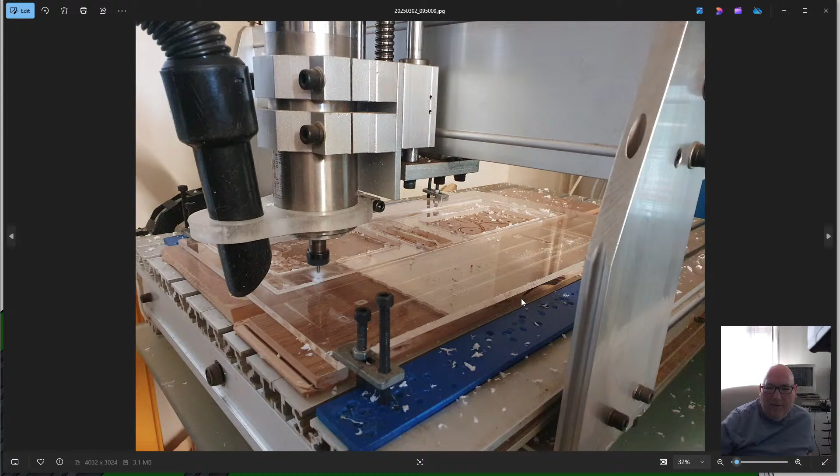Open. Oh, I took a picture of it. Oh, there's my, there's a panel. Took a picture by mistake instead of video.

Alright. Yeah, so it makes a right mess. Anyway, let's come out of that one. Come out of that one. Let's see what we got video wise.

Yeah, very messy. Don't know what's cutting out. Oh, the back panel. It's a milling of the back panel.

Gonna have to get the laser set up because there's too much tidying up to do after. That's the problem, too much tidying up to do, like, after you've finished. Sounds like hard work. Right, what else we got?

There's a bit of it cutting out the back panel. Tell you about the problems we had. Some problems. Just tidy up, look at the milling bit. All the plastic's stuck to it. See it? Not good.

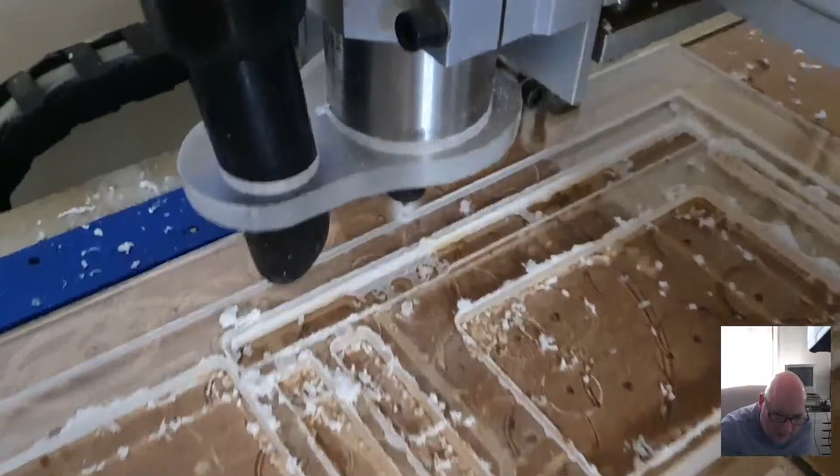I hope it isn't too loud. I hope it isn't too loud. Anyway, we can jump past that. Oh, it's only a short video.

Yeah, it flung it all over the workshop, all over me shirt and everything. Right, last clip. Might as well just let this go. It's just potting some holes.

Yeah, it's going to have to be laser cut. Well, I'll use this as a prototype for me to get all the sizes right. Vacuum's on the go now. Yeah, it's noisy.

I bought a milling bit as well from a tool station. It's like, you know, like a tool shop you can go and buy stuff from. It did half a thing and then it snapped. And my fault.

That's it cutting out the... Oh, I think this is the shoulder, the CD caddy shoulder or shelf bracket. So we're gonna get the laser machine out, but it only does a certain size, so I'm gonna have to see what's the greatest size I can get out of it.

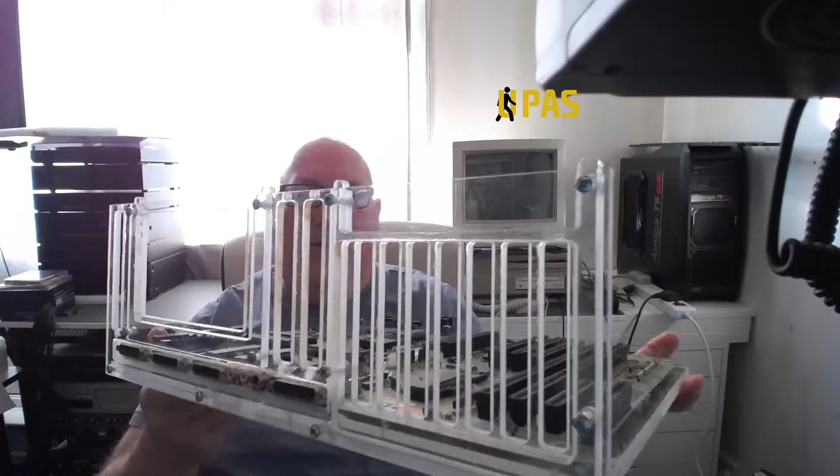It's already heavy, so we got the. It's looking like a back plane, isn't it? Power supply and shelf there.

So it holds itself okay. The idea of fixing it there, there, there and there was okay, and they're fixed. If you can see the nut and bolt.

I had to cut them by hand with an angle grinder since I didn't have the right size. Obviously need to buy the right size ones, and then the rest is just fixed in place. I'll make this a short one, and I'll put this one out on some of the Amiga groups.

A few scratches and that - it is reclaimed plastic after all. Some of the holes went a bit wild, and then we got the trim around here, pocketing it. I found out it's not a good idea. We've got to avoid pockets because it just goes milky and white. I knew it would, and then it started breaking apart because it was too thin.

So we'll just create one and laser cut it. This is okay as a template to make sure your sizes are sort of in the ballpark, but yeah, just a proof of concept really. And it holds it pretty stable. That hole there made it thin and it broke - it actually broke there, but because it's rigid, held to the bottom, you can't tell.

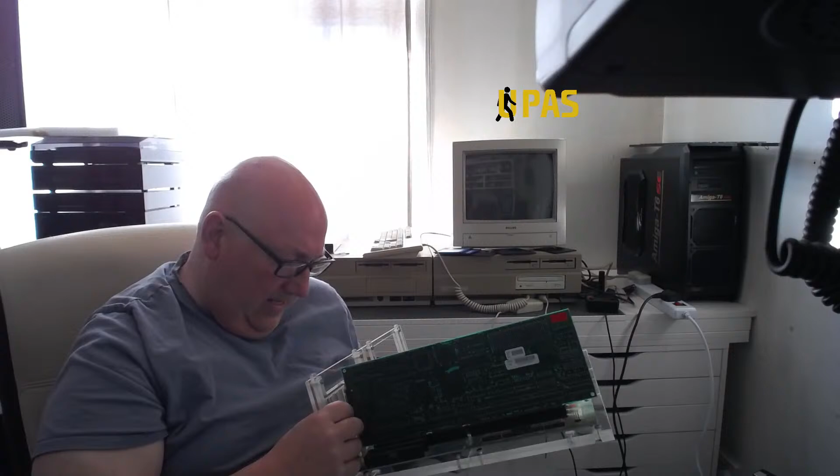Let's have a look. Not sure - that doesn't look right, does it? Something doesn't look right, and I'm not sure why. Is it touching the floor? No, it's not. I wondered if the steel bracket was touching the floor. Touching the base - it's not. There's enough clearance, so that's not the reason.

It's all the way in the slot. Let's see if it's angled. Okay. I haven't actually fastened the motherboard down right yet - got some screws missing. Yeah, so... oh, is it a bracket? Maybe it's a bracket. Actually, it's the...

Yeah, it's parallel there. If I just fasten the, push that down, because it does stick out on the real one. It's touching the surface, let me have a look. Is it touching the surface? Yeah, it's touching the surface, so you could put a screw in there. Well, I don't know if it's square - are we square or are we slightly out?

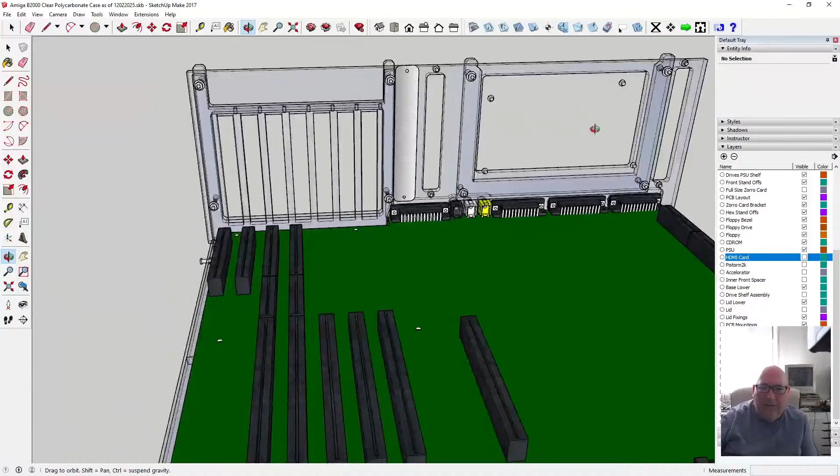So yeah, we probably need a 4mm piece on there. In fact, that might be better actually - get rid of the slots off there and pack the spacer that we've got. That spacer there - hang on, let's get it in this mode, you can see it better. So make a hollow one like that, and use this as the 4mm part that gets thinner.

And or maybe, sounds crazy, but mill that out of aluminium, 4mm aluminium, and you can drill and tap it then. Well, don't know, sounds crazy. Maybe just plastic.

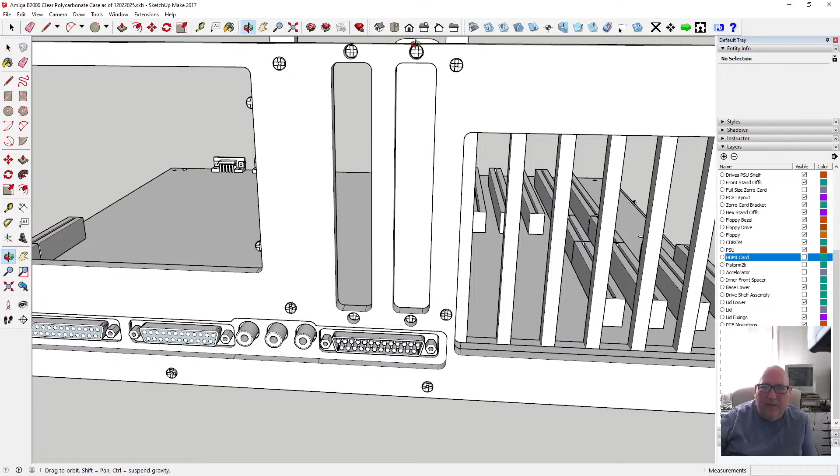So now my CNC laser cutters, my laser engraver rotors, they'll only do a certain size. Now when I milled this back plate out, it broke there - I think it broke there, it's too thin with that pocket. It didn't work out, pocketing doesn't work out. This almost worked out, this pocket here. I probably made it too thin.

So the only thing is, I don't know how you can pocket with a laser cutter. A laser, it's not a router, so it might have to be routed out. Or we alter the design slightly, somehow. Maybe we have a laminate sheet, another thin piece - probably have a thinner piece of clear polycarbonate or clear acrylic that does this bit here, about 1.5mm. You don't have to pocket it, it's laminated and the screws hold it together, so you'll have an extra piece that sits on top of it basically.

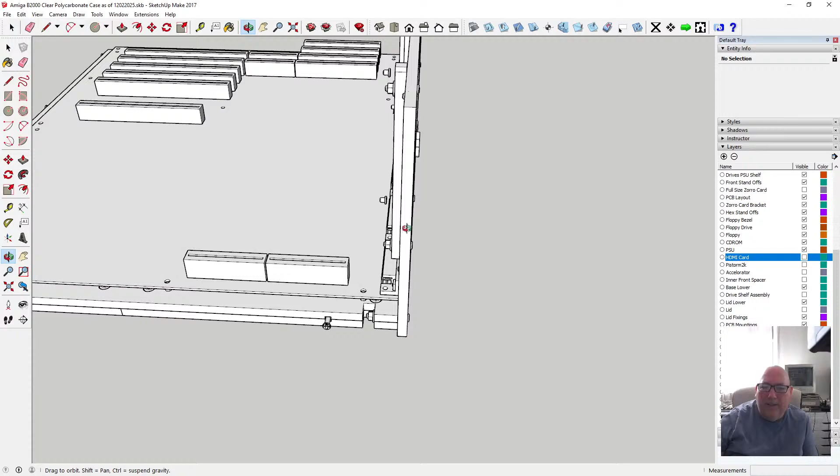Yeah, I don't know if you can pocket on a laser. Let's try and Google it, let's see if it's possible. Let's just Google it - laser engraver pockets.

Don't know. Making leather wallets, pocket cutting path with a laser - is that a pocket? Unless you're... can you actually make? I don't know, I'd have to study that anyway.

Let's just... mine can be converted to do slightly wider, but now this is a bit too wide. Let me have a look. This is 445 - you won't get that out of a laser engraver. I think you can get about something like that out of it. But people convert them.

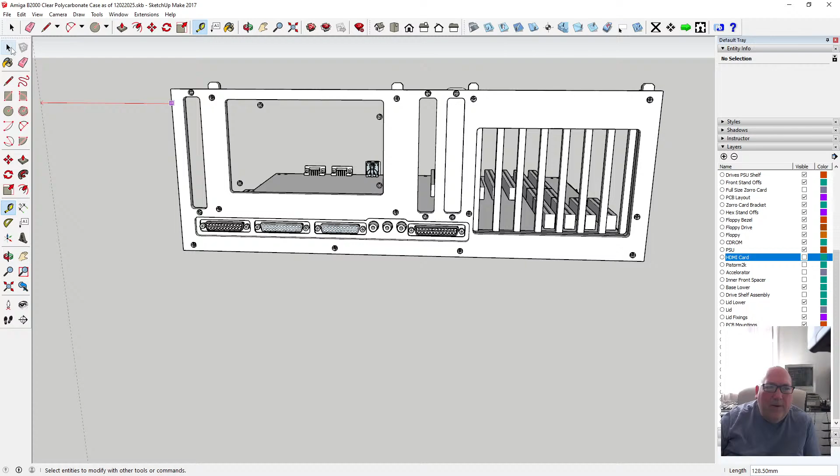I don't really want anything bigger than the one I got, that's big enough already. So, but people do convert them. Unless I go clever and make - because that nearly broke there anyway, and it's only attached from there down there, so it's thin anyway. So unless I make it in 2 sections.

Let's have a look. So up until that point there, what's that? Right, hang on, we want a tape measure, not that. So yeah, we could probably mill out sort of that bit, and then this bit separate - keep that together, because that's all ports. Or split it there, somewhere like that, maybe.

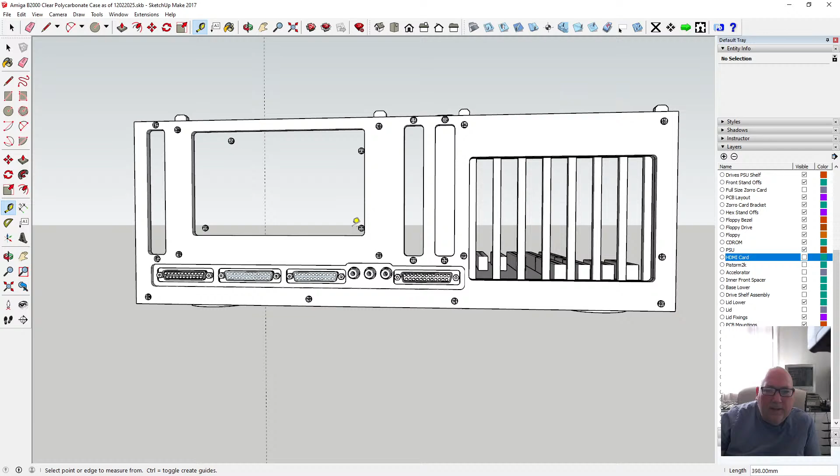Put the fixings in as well. So anyway, I think the idea is it's the same as this pick and place thing I made, going back a bit.

They're great, but if you want to pocket it, it turns milky, so you're better off cutting it straight through and laminating it with a different size sheet. I think that's the way to go, to tell the truth.

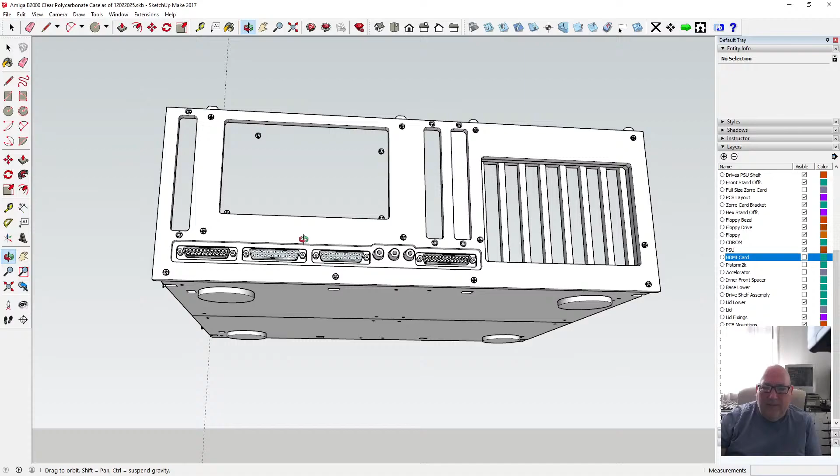So we could laminate it. I even thought about doing the front and back out of aluminium.

Right, so anyway, why have I got a line there, I wonder? Put that in by accident, did I? Yeah, so it's this idea of fastening it like that seemed to be okay. It was alright, it's strong enough to hold it in position while you get all the other stuff on, and the lid, so it's okay.

Now the stuff I made it of, I think it's cast acrylic, so it does shatter, and it's not very good for drilling and tapping. It's alright for milling, but not drilling and tapping. It's ideal for laser cutting.

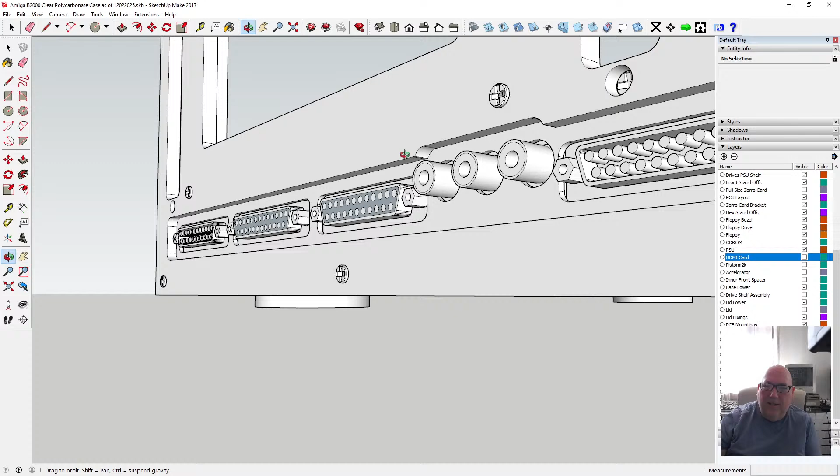I've got a bit there. There's a bit of it there. I think this was laser. No, this was milled, you can tell it. That was actually milled out. Yeah, you can see the milling on that one.

This is like a stand for one of the partitions, made out of the same stuff. You can't see it anyway. Hang on, yes, that's a bit of scrap, but it is milled. But they must have used the right tool, I got the right tool on it.

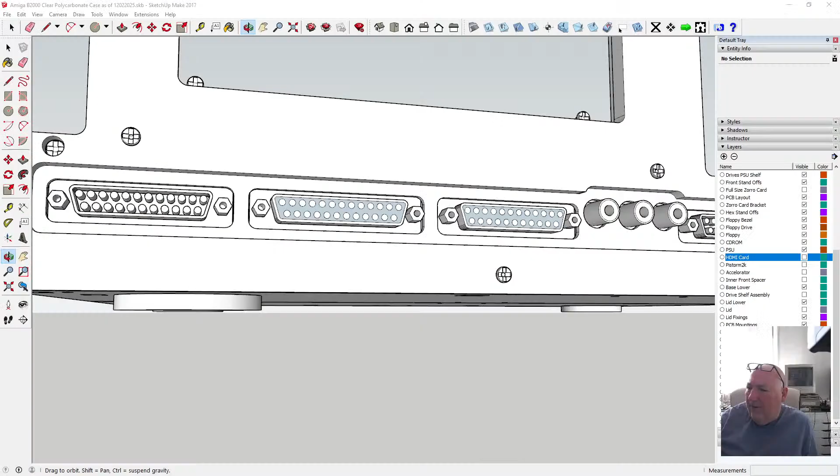All my plastics, I had to go around and just trim the burr off the one side. And it's a lot of work, and it's not worth the effort anyway. So...

I like this idea because it did fit round it, but I just milled it out too thin, a bit too thin. So it could probably go half the thickness.

But if we forget the pocket, if we just have a laminated sheet where we mill out a different thing, the same sheet could then be the back plate, the filling for this as well. So we'd have to redesign it. Lots of changes to it.

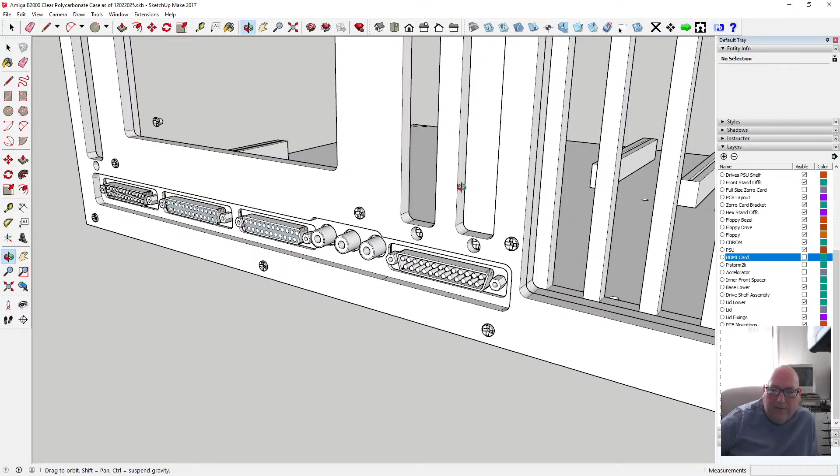We could also do these sheets as well, fill that out, same material, because the same piece will fill this out as well. So you could use it to mill all that out, and... yeah, we also need that fill here.

Let's put in a Zorro card a minute and see if we've got... I think we had a space anyway. Right, so Zorro cards, I'm sure we had, there's a gap. That's the gap we got, and that. So we knew we were going to get that anyway. So that's exactly what we've got on the finished one.

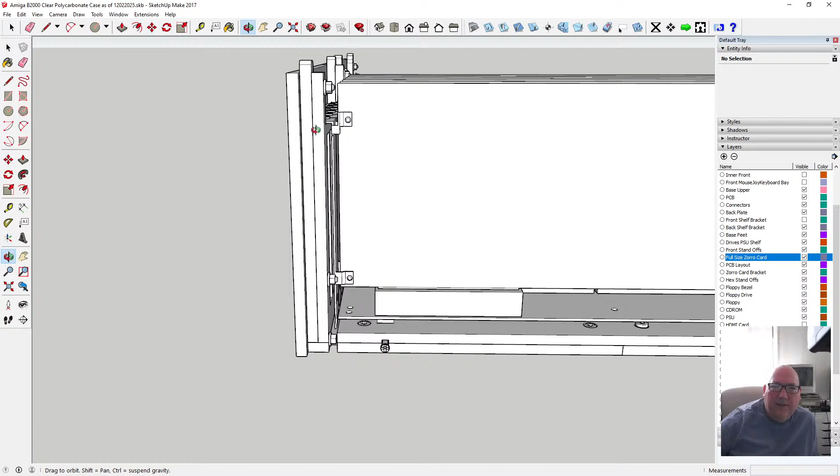So we do need this extra piece in there made out of thinner stuff. Okay, we can get some thinner stuff. Yeah, so what we'll do is change the model slightly. So that one can actually go there at the back. Right, let's do that now.

It only bolts together, so it's not... and you can sandwich it, so we can sort the back out. Let's sort the back out. Right, let's sort that back out. So I'll go into here.

Have a look at this. That's just exactly the same, just needs to be smaller. Let's say it's 3mm. Let's make it 3mm, so exactly what we got there, but 3mm.

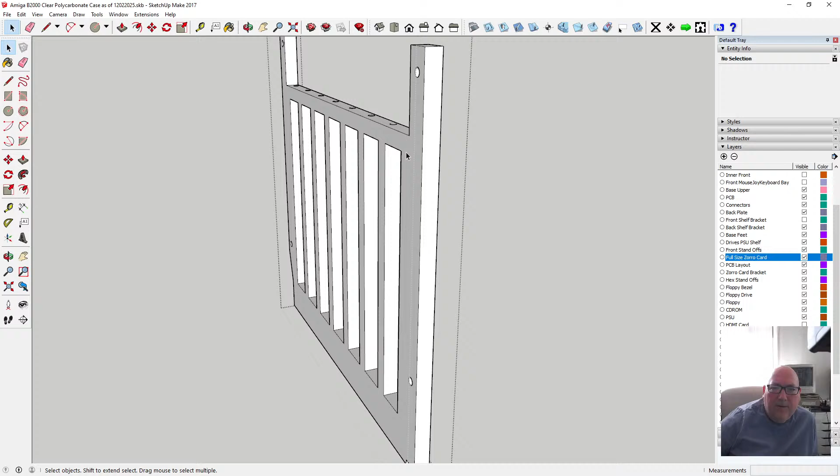Let's go onto this face style, monochrome. So we'll just go onto that, and we'll just make it 3mm less. That's it. The only problem is with 3mm, you can't get your fixings in. So really that ought to be made out of aluminium, I suppose.

Don't know, so 3mm's too much. So 4mm. If we go down 2mm, what's that looking like? That's not bad actually, the hole's sort of in the centre, so I think 4mm. We'll keep that at 4mm.

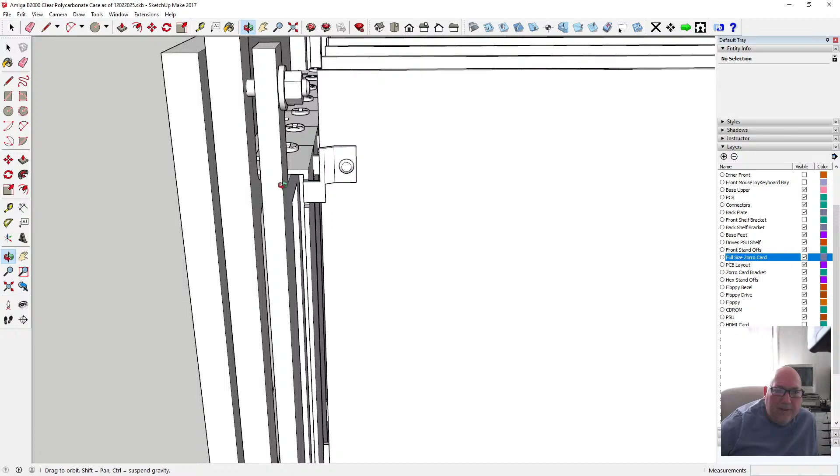So we've got that gap there. Then it needs to move over and fill this in here. So we need to bring that over, at least to where the screw is, but the screw seems to be in the right place for the plastic.

Tell you what, let's have a look, end on. Where is it? Wrong end, this end, yeah, that end there. In parallel projection.

Let's come over here, let's have a look at it. So that piece is banging where the screw is, really. It is where the screw is. So I've still got the spacing the same, but we'll have to bring that forward.

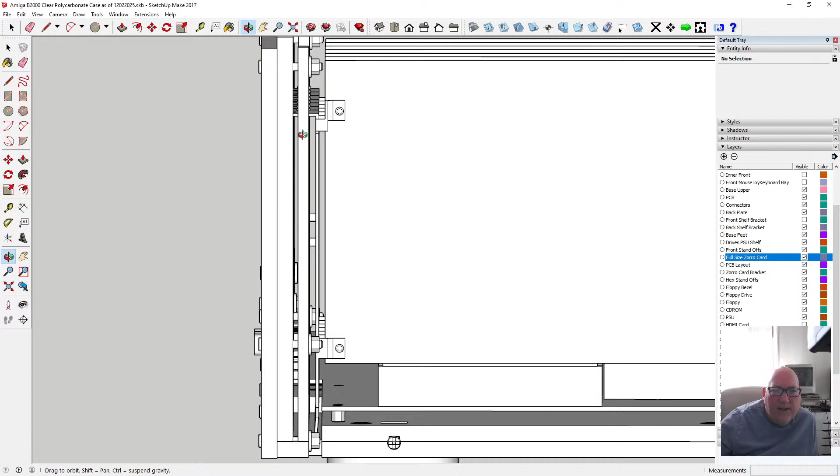If anything, it needs to be thicker. Yeah, if anything, that needs to be thicker, really. Yeah, it needs to be thicker. Maybe thicker. Or we'll leave that where it is. Don't know. Not sure.

Undo, push, pull. Right, let's put it back to where it was.

It'd be nice to make it so I can make it on the laser I've got, so that I don't have to get a bigger one. I haven't got room for a bigger one. But the base turned out well being laminated, and if I cut them out into corners...

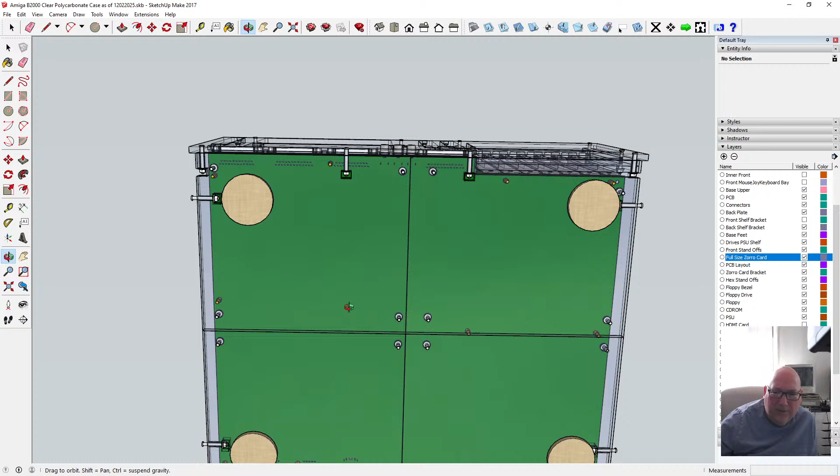How are we going to sandwich them together? It's just quite a big object, so I don't think there's a way of doing it. So we might have to get a bigger CNC or convert a bigger laser. But we want to be able to cut it without having to do anything to it, just cut it and assemble it, no trimming with knives, no adjusting, no nothing.

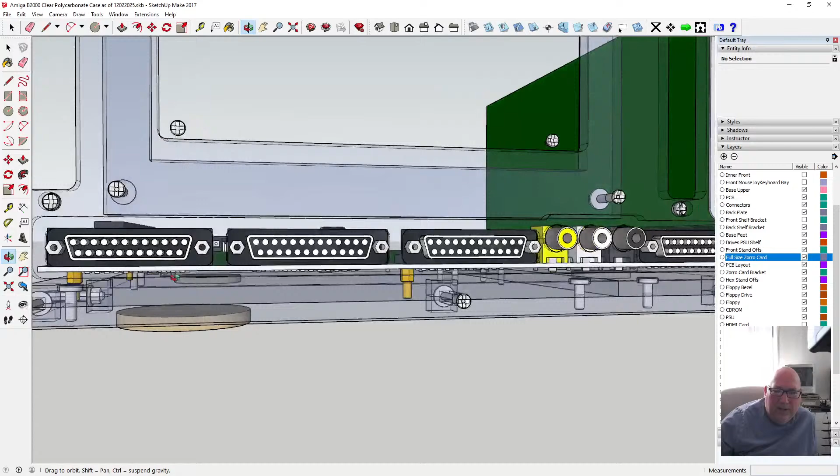No drilling holes, opening the holes up. So I'm going to have to look at... can't work a way of doing it. Let's have a look, see if we can find out anything about...

K40 laser, maximum size. See if it knows what I'm talking about, the cutting area of it out of a box. What is the maximum it can be upgraded to?

Alright, so it looks like it's 300 by 200. Yeah, that's about right. I'm at 350 rail to rail by taking out the base plate, replaced it with a set of aluminium sheets. I'm at 350, right, okay.

350, so that's still not enough, because we've got something like 400 and something. Now what I've got, I'll tell you what I've got, a 500 milliwatt laser CNC, but it won't touch plastic. It'll just, you can draw patterns with it or cut out very thin foam or something, paper, you can cut paper out.

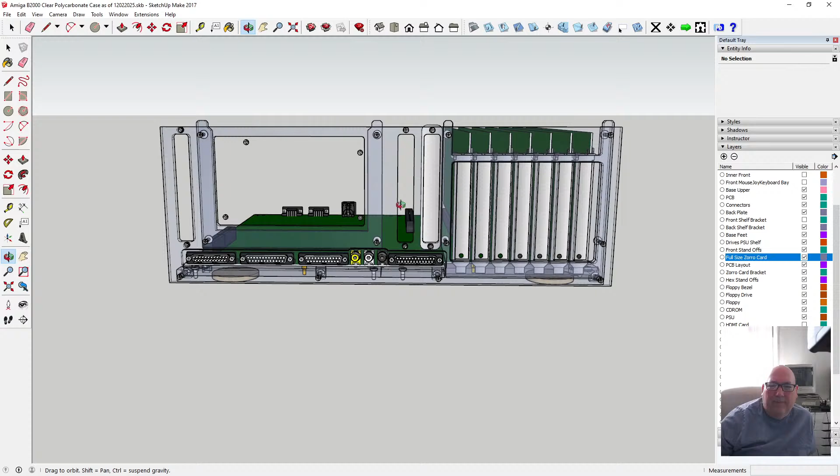Now that could be made to carry the... probably not a good idea to try and put heavier stuff onto that. So it's a bit of a weird one. Anyway, let's get rid of the cards.

Yeah, so the idea turned out okay. Let's just have a look, we'll have a look at it again. Hang on, let's have a look at it again. Let's have another look at it.

So, yes, you can model it. Yes, you can make it. Yes, it will work. Milling it's not good because you want a clean cut, a very clean cut on it.

And that needs to be deeper, so it needs to be not 6mm, but then you don't want too deep to get at your connectors, because then you'll have a hard job. Actually, you know, we can actually put a floppy drive in there.

So let's try that now. I'll take a floppy drive into that bridge board. Let's see. Yeah, you wouldn't get it in.

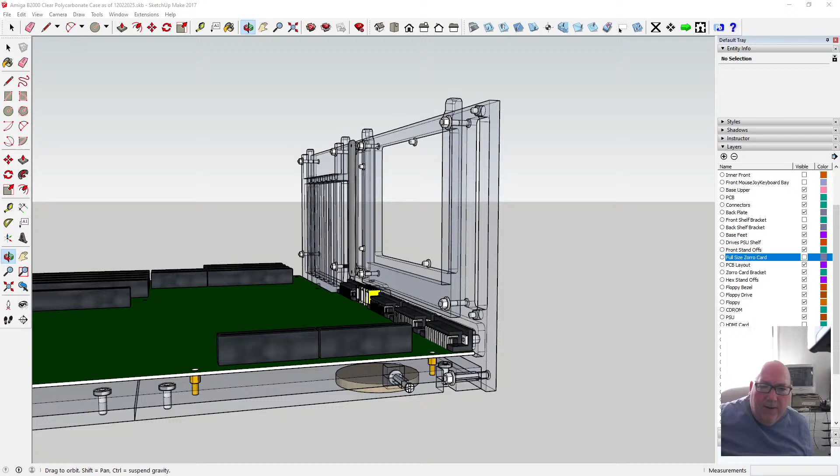Let's do that now, let's do that now, let's do that now. Right, so what we're going to do is we're going to make that thin, so very thin. Yeah, because the cards, they don't actually reach anyway, so the gap at the front, we'll make it thin. Yeah, so what we'll do is we'll change that. Let's just put it in this style, you can see better.

So we'll laser cut this out. Let's find out what the distance is between the bracket and the face. So let's just go like that.

It's 2 mil. No, it's not. 2.75 it is. Alright, so it's 2.75. So we'll allow half a mil, we won't want an absolute dead fit. So we'll put 0.75, something like 0.75 is there, so that'll give us 2 mil.

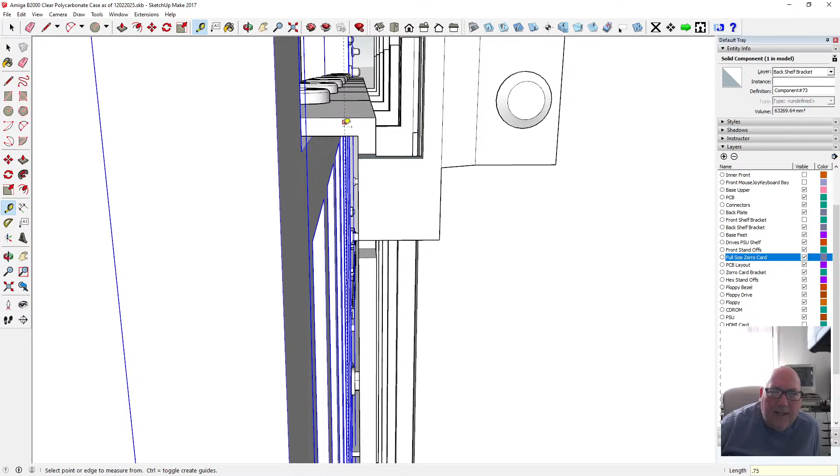So we want some 2mm polycarbonate. Right, that's what we want. So what we'll do then, I'll go into this. We need to take them holes out and copy them over.

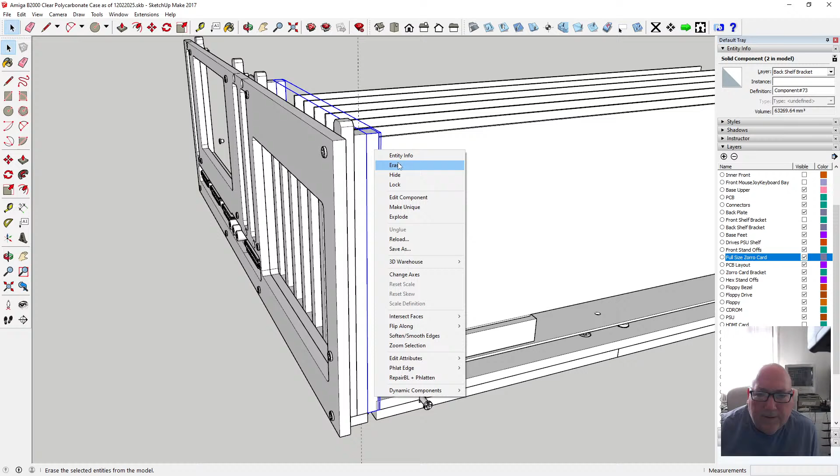So what we'll do is we'll copy this. Come out a minute. Right. No, we don't, we want to copy that. Move it 6 mil, I'm going to make it unique. And go into it, and we're going to make this thinner. So it's 6 mil now, we only want it 2 mil.

Tell you what, before we do any of that, let's get rid of these holes, they're going to get in our way. We're not going to have holes on this bit. So we need to look at it from above, in parallel projection. So we want to get the holes out.

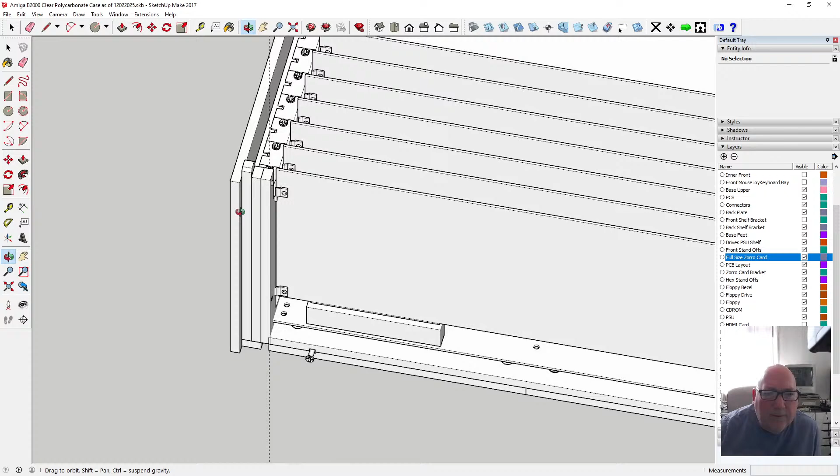Let's make sure I haven't selected anything else. Doesn't look like it, so we're going to delete them out of there. Right, okay, that's good. What is that there? Something not right there, is it? Look at that, oh, it's the bolt. It's the bolt we've put in. Okay, that's fine.

So we've got 3 of them now, but it's still 6 mil. I need to make that 4 mil now, now we've got rid of the bolts. So we're going to push that down to, sorry, make it 2 mil. So we're going to lose 4 mil. That's it, so we lost 4 mil.

Now that's got, right, I can't see it. Where's it gone? Oh, what's it doing over there? Hang on, let's undo that. Undo the push-pull, let's push it from the other side.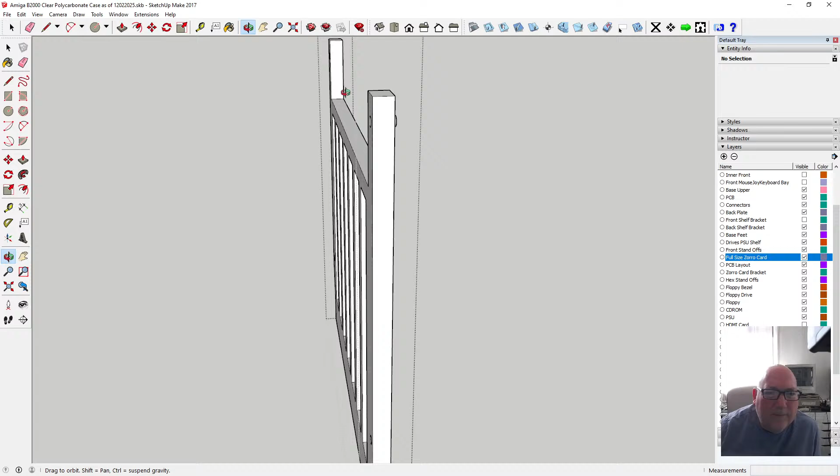I've got some weirdness going on here. Oh, it's not the bolt, is it? What is that? Don't know what that is. Oh, it's the hole's not quite right. So we'll get rid of the hole, and I'll push the hole through again. Oh, there's no hole there.

So we'll cut it, come out. Paste it in place, go back in, and paste it in place. Push it through. No, that's not the one. Right, what's going on? No surface on it. What's happening? No, that hasn't done it. Right, then push it through. Don't know what it's doing.

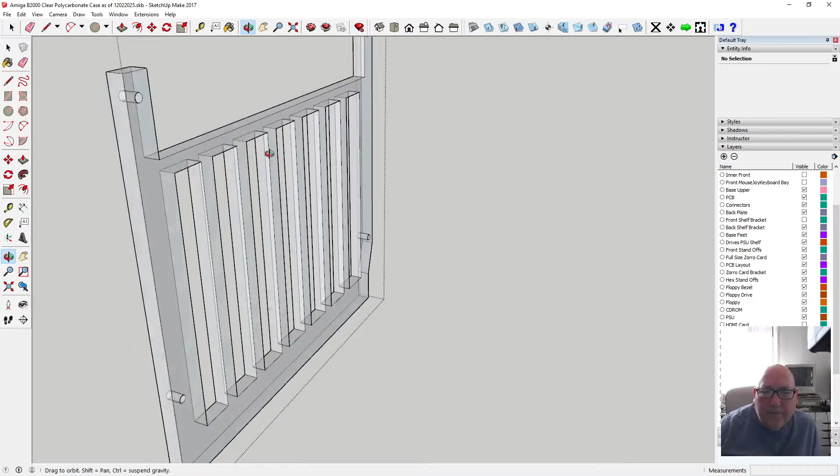So we cheated. Right, okay, so we got it back. And we want to push this 4 mil that way, so it's only 2 millimeter. Right, okay.

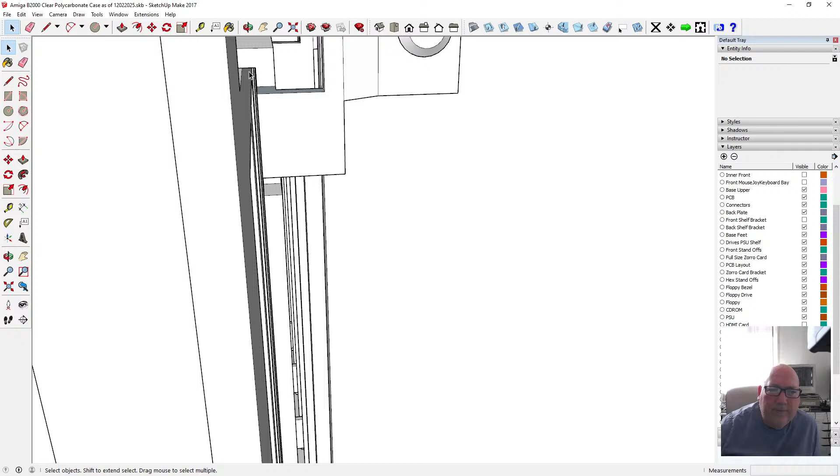So we've got this extra piece that goes on here, and what does that do? Still got a gap, why have we got a gap? That's the... yeah, we always have a bit. I can't see it in this mode. Hang on. Right, yeah, so that's better. We've got 0.75 mil of a gap, we can live with that, need a bit of wiggle room. So that just fills that into there.

Alright, obviously that's got to be adjusted to allow for the nut, so we'll have to do that again.

Lock slide! How are you? How you been? Sound, have you been okay? You okay? Hope the weather's alright for you. The sun's out, but it's cold. But yeah, you can hear the kids playing, some kids playing outside with the football. Yeah, I haven't seen you for a few days. Yeah,

I've just built the thing now. Built it, I'll show you again if you've got, unless you've just seen it. Yeah, built some of it.

Right, I built the bottom base, the plastics, and today I milled out the back plates. So it's a bit of a first off, it's like a first trial, what do you call it, prototype for testing whether you got your dimensions right. So the other thing that lets me down, I need to stop milling it on a CNC and laser cut it instead. But at least it's proof of concept, get your sizes right, you know.

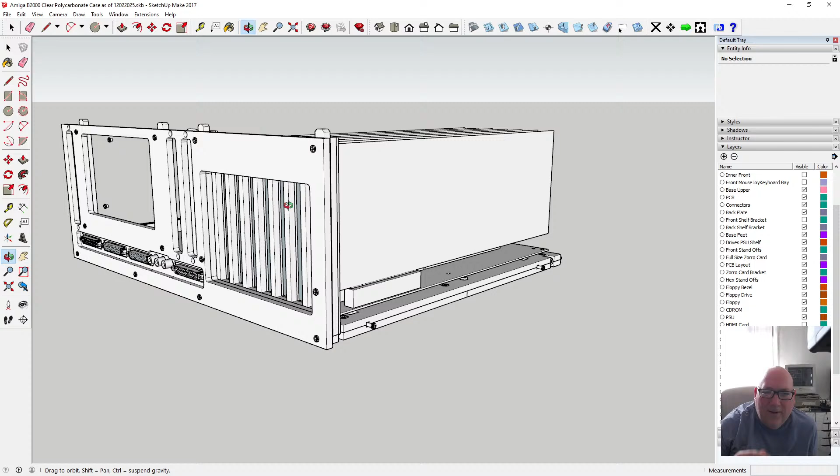Copper plate, etching a copper plate, yeah. Oh god, mad. Yeah, CNCs are great for certain things, like a CNC'd...

Tell you what, give me a second, I'll go and grab it. You'll like this. Let me go and grab something. Back in a second.

Right, that was more than a second, but anyway, you'll like this, I forgot all about this. You'll like this if you're into intercoms. Look at this thing - this was one of my first CNC milling jobs out of aluminium, and I even milled out clear polycarbonate infill.

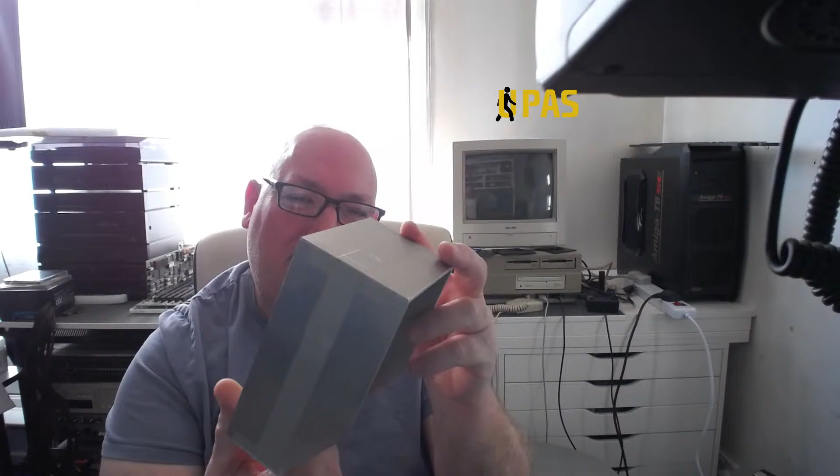Can't remember how it sits there. How does it sit in there without collapsing down? I don't know how it sits on there without collapsing. Oh, I've got some metal pieces, I don't know - without taking it apart, I can't remember now. I should have had some ingenious way of doing it. Anyway.

So with a CNC, it's only a cheap £1,200 CNC, but you have to mill it at 0.2 of a mil, because it's not brilliant - the CNC thing's not brilliant. Anyway, I'll put that over there, I forgot all about that. Yeah, but my...

Let's have a look what you've got here. Yeah, quick tack here and there. I mean, I have these spates where I start stuff, and once I get past the initial design phase, it takes a while to do the milling - it takes about an hour for each.

I even milled out a gasket for somebody's head gasket - it was an infill for their engine so they could attach some kind of thing. That was out of aluminium, it was no good. I think they used it as a template to mill out. Anyway, it's crazy stuff.

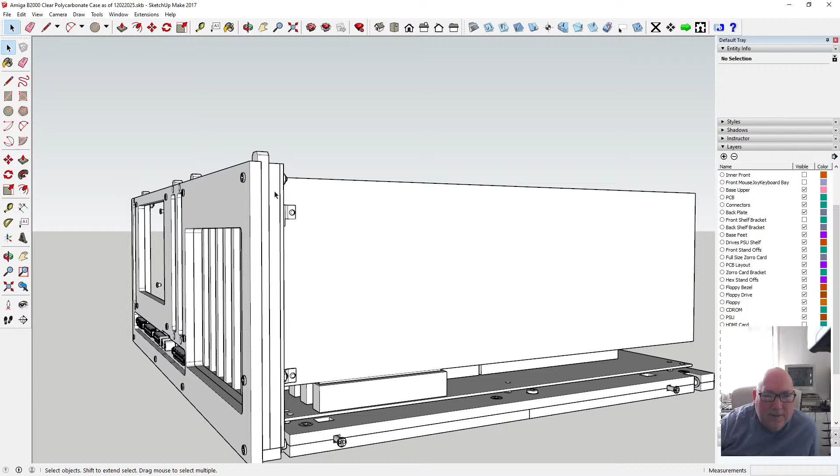So, yeah, we've got that extra bit there. I need to lose these bits on there. Can I just use... just wonder if I could use the other one. That one, yeah, it's got the round corner, hasn't it? So I could do with that, but again, let's copy that.

CQ, Mike 7, Hotel Juliet Charlie calling.

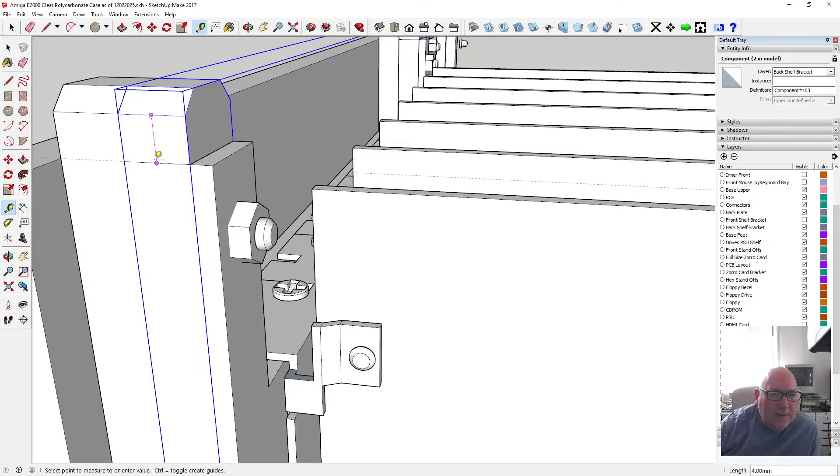Yeah, so I'll copy that, duplicate that, move it 6mm over, but I need to take the top off it. I need to just put a line around it there. Let's work out what that is. It's 4mm, okay, that'll do. So go into that, put a line around it, 4mm, and we'll just...

Yeah, there's so many tools, isn't there, to use. I wanted to use Fusion 360, but they even let me have it for 12 months on like a start-up thing. In that 12 months, I never touched it once, and then it ran out. You don't mind paying for something if you're going to be earning some money from it, but if it's an obvious thing you're not going to earn any money from it. So.

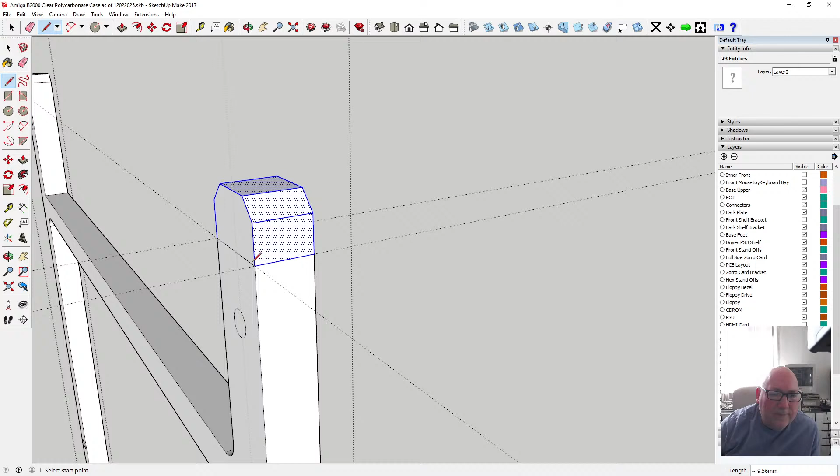Right, I need to get rid of these now. How am I going to do that? Just do that? Yeah, I can do that, can't I? Just delete that. Oh, I need another line here. Right, that's not good, is it?

Panicked for a sec when I heard the kids' noise. But it was from your stream. Yeah, they're noisy outside, round zero, but sorry, mate. They're noisy, all the windows are shut, but yeah, these houses, they're not exactly built well. You know, they're built, the soundproofing is not good, if you know what I mean.

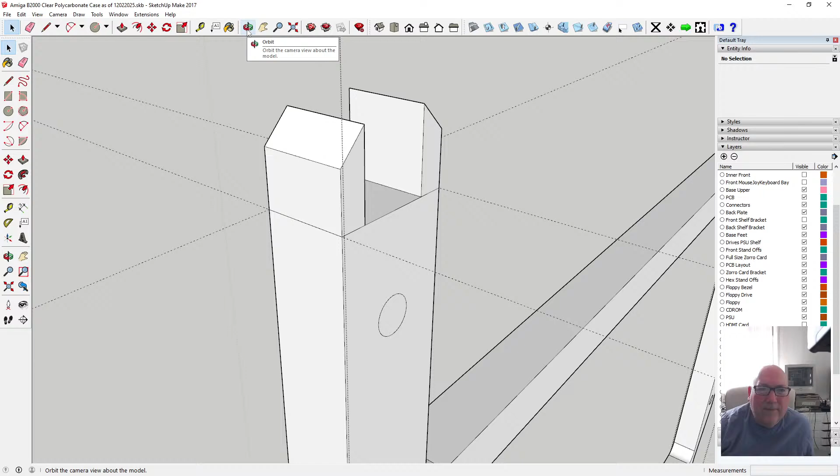Right, so have I got everything I need? Almost. Tell you what, right, so let's just, I don't know how to do this, right? What happens if I just go like that down to there and get rid of each one of these? Will that work? No. So I know what I'm doing. Right, I don't get it. I don't get it, what am I getting rid of? Get rid of that, that, and that. Okay, won't let me select it all at once.

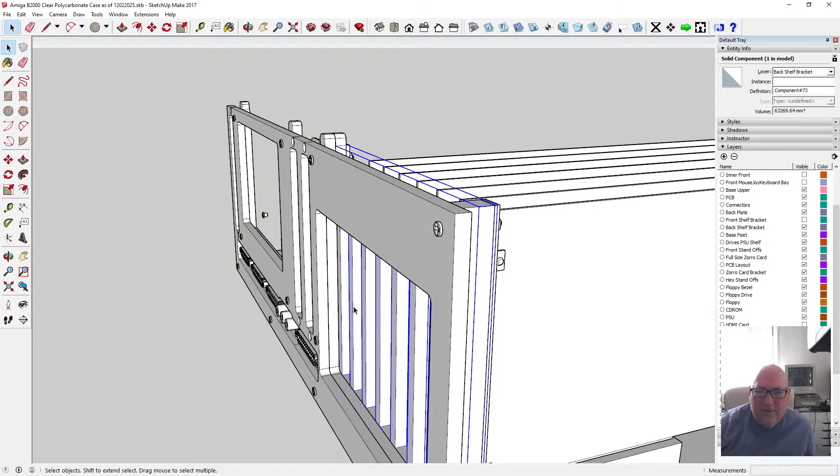Right, so that's that. Oh, I've got to do the same the other end yet. Right, so yeah, so I need to get rid of this one now. That one needs to go. Shall we just delete it, or yeah? Right, we've deleted it. So we've got this thinner 2mm piece that's just overlapping the cards. It's just to stop the gap showing between the two cards. There, that's okay. And then that looks better actually, I'm liking that better. So I just need to get some 2mm acrylic to make that last piece. Luckily, well, I'll just chuck them two and I'll make another one of them.

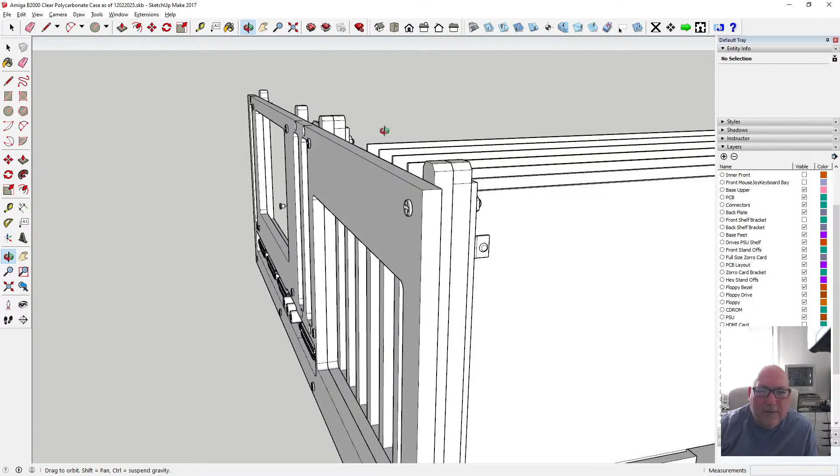Oh, what have I done here? Look at that, I've lost my... that's not good. Hang on, I've lost something here. What have I done? Just undo. I've made a bit of a... maybe I forgot to make it unique. I thought I made it unique, actually. Did I not make it unique? Did I not make it unique? No, I didn't. That's why I didn't make it unique.

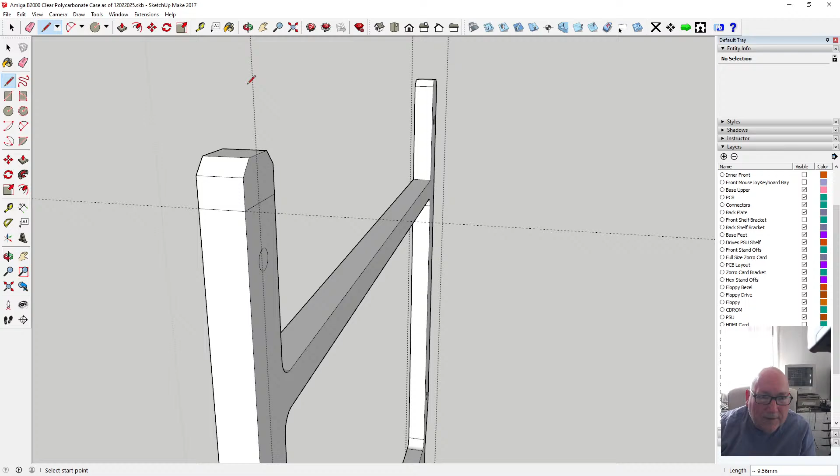So I need to keep that one, because that's got the fit that fits into the lid. Now this one needs to... right, that's not the right one, so yeah, so that one... right, I need to do that one again, edit that one. So let's try again, 4mm. So I should be able to just... should I just be able to draw around it? Should be able to just draw around it.

Yeah, don't cuss the kids for making a noise. Leave them to it, leave them to it, because we were all kids once, weren't we? Do what they want to do. Sometimes the football will smash against the building. You could put up with so much of it, then if it gets a bit crazy, you think, what the hell? Come on, play the game. Stop it, like, you know. Trying to concentrate on something.

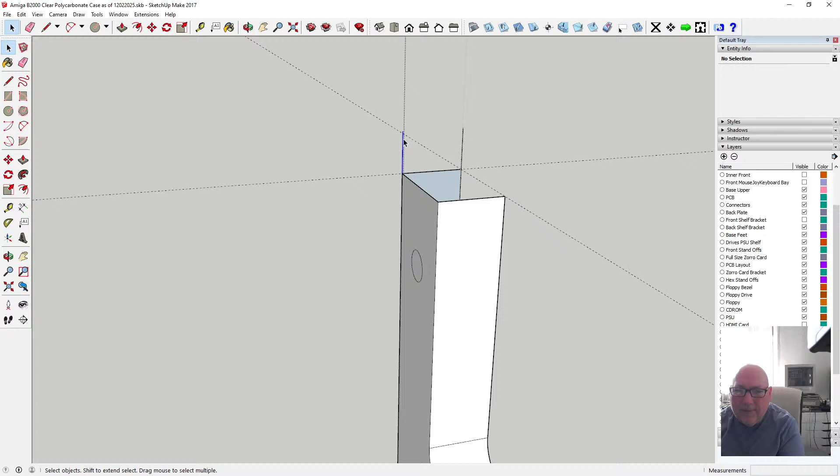But, oh, what have I done now? No. Right, we'll get there in the end. I've lost one of my surfaces now, so that's not good. Doesn't matter, it just means I'll have to go back. Mind you, I'll probably put the surfaces back, but it'll be the wrong colour. So let's get back out of here into that mode. I'll select that face and that face. I'll have to change it back to transparent.

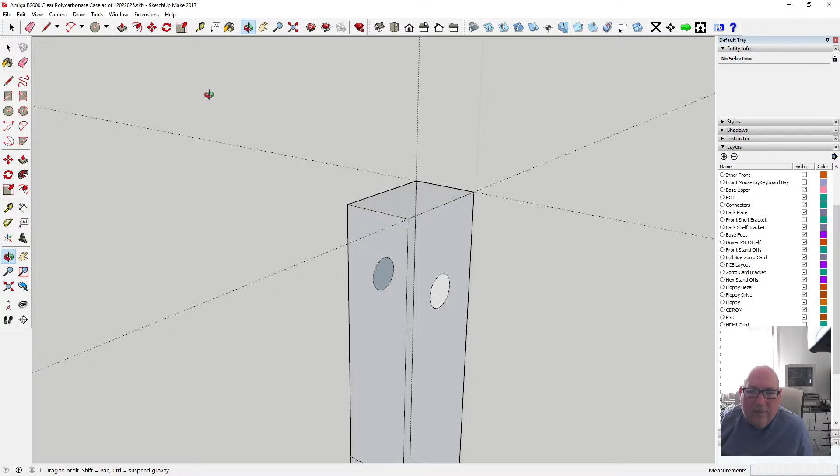If I can't find it now, where's it gone? It's just disappeared. Hang on. Right, that's it. Oh, apart from the hole's wrong now. Don't know what's going on here. How can the hole be gone? Okay, it's playing silly buggers.

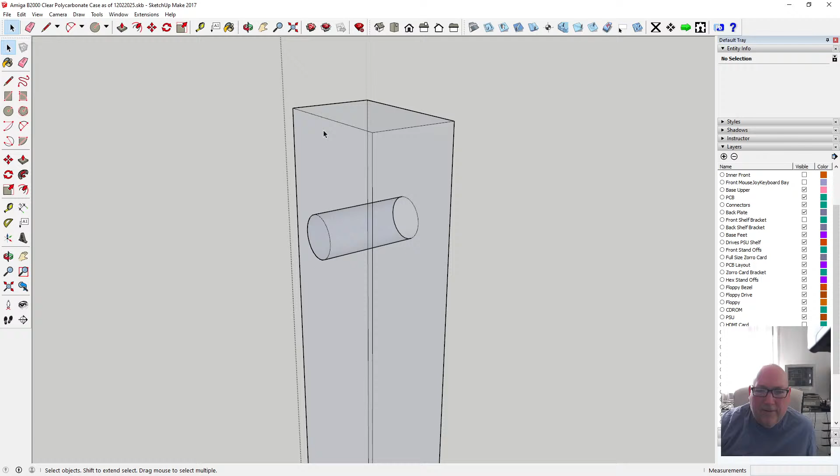Wow, congrats, 36, so it'll be 20 years from now for me. Right, it goes quick, mate. Don't half go quick. The older you are, the quicker it goes. Don't know why. And your voice starts getting all gravelly as well.

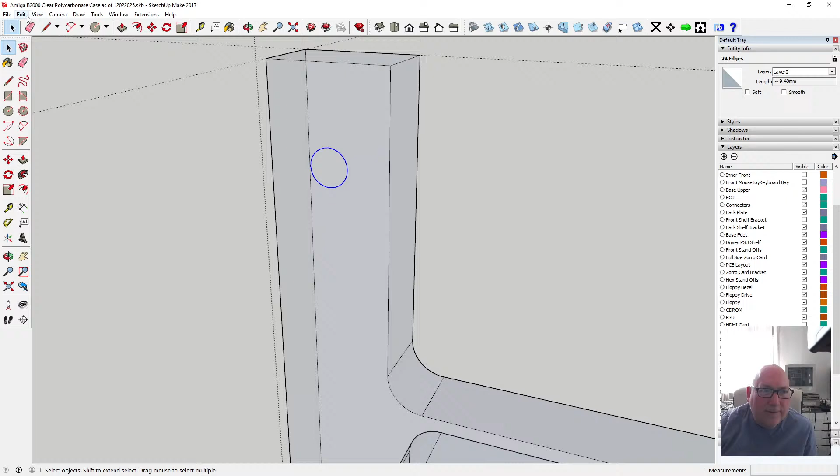Right, so I need to get that off there. Cut it off. And I need to paste it in place. And I need to get at it. I can't see it because it's not pasted in place. It's that's in the way, isn't it? So I need to move.

I've got to move this and that out of the way, temporarily, so I can grab hold of this. And there's probably more than one. No, paste it in place. And then what I've got it, and then I've got to cut it. And go into this, and paste it in place. And hopefully, yeah, now I can push it back through to there.

And it's done something strange. Ah, because it's exploded, isn't it? No good, that's no good. Right, so what we'll do is undo, paste. So paste it in place. We'll put that there. I need a size off it. This is where the program gets crazy.

So I need to come down to there, 7.5. I should have known that. Now, is it 7.5 across as well? No, it's not. It's a weird arse. Something weird arse size. Half. Is it half? Yeah, just half of the thickness.

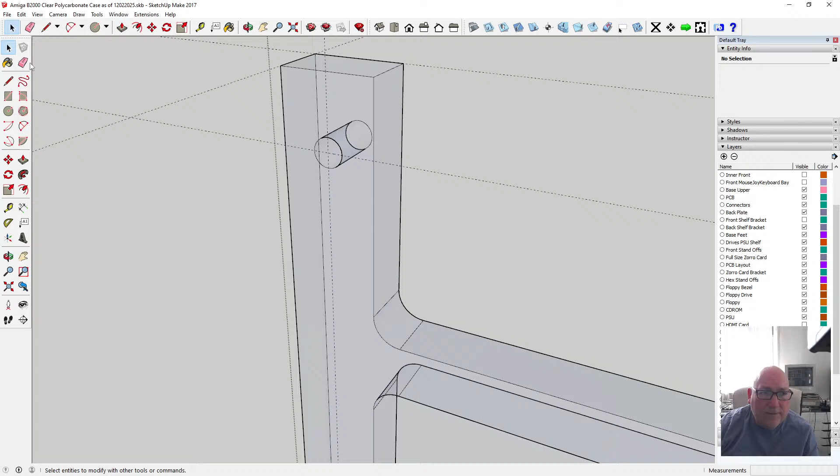Right, okay, so I don't need that then. I can get rid of that. I can go into this. Just draw me a line, 7.5. And then I'll come in here to the halfway point and put in a hole, 1.5. And then I can push it through, and then I've got a clean hole without all them stupid lines it's trying to put on.

What's all this lot? Why have I got loads of this? Oh. Right, so I need to grab that and push it back 20mm, so it's back where it's supposed to be, just to repair it. So I've got now the laminate sheet, 2mm there, and 6 and 6 and 6. That fills that out nicely, you can't see it. And I also got to trim this down here, that shouldn't be like that.

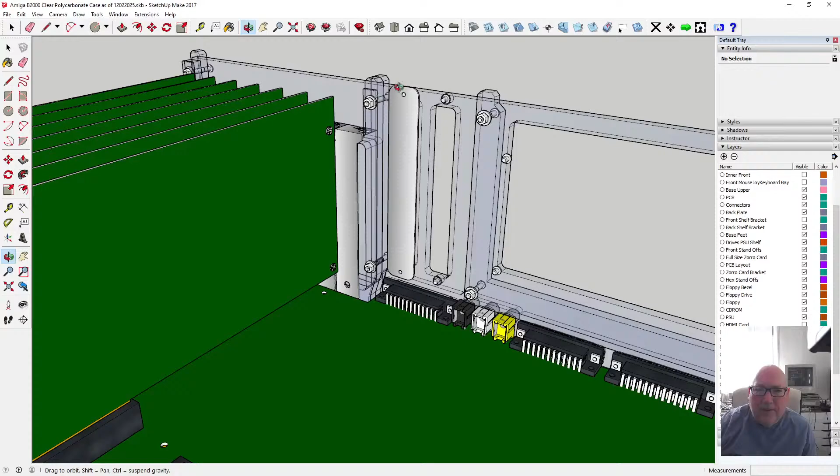This end's got to be done now. How far down though? Tell you what, let's just copy that. Bring it down here straight and just bang. Ah, problem now because this one's not as wide as that one. Okay, we'll go with it.

Okay, so I should be able to get rid of all this now, apart from that. No, we've took the surface off. Why have we took the surface off? Okay, we'll take it apart bit by bit.

Yeah, what was that tool? What was that tool you said you used? I think I've heard of that a while back. I'll have to scroll up and have a look. What was it called? Tinkercad. Yeah, might have to look at Tinkercad.

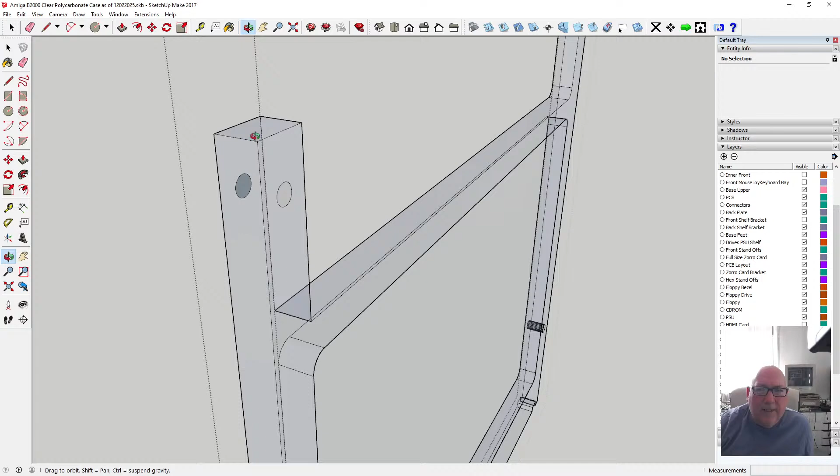So we've got this hole there now. Right, so it's got the surface gone. I've got the same problem again now. Right, let's just get rid of that. Get rid of that one. And measure it down. 7.5. And was it in the middle? I don't know. Can't remember if it was in the middle now. Soon find out if it won't line up with anything else.

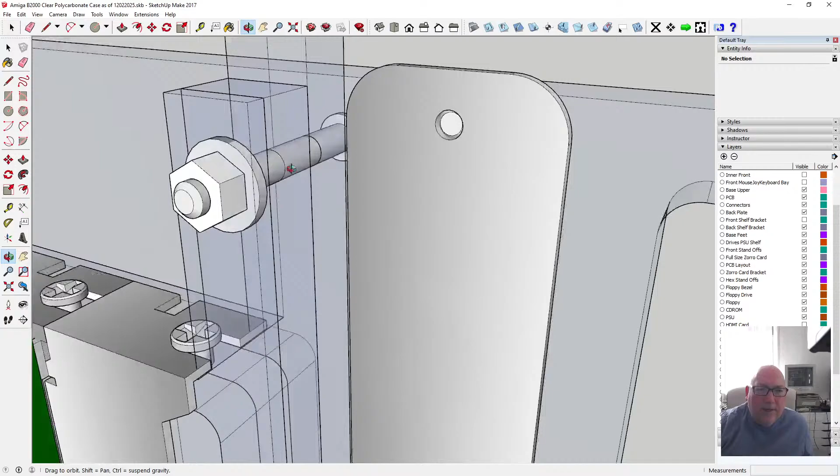Right, let's get rid of that and that. Does it line up? It seems to line up. Yes, okay. So we've had to put a packer in there, a 2mm packer, because we've got a bit of play otherwise, too much play. Okay, so that stays as it is.

So now, if we go back into this monochrome mode, we seem to have something not right. Let's see what it's done. It's got a new surface on it, hasn't it?

Right, so I need to do something called intersect the faces with a model. Can I just grab that? What about, can I just grab the bit that I want to intersect? Not from this angle.

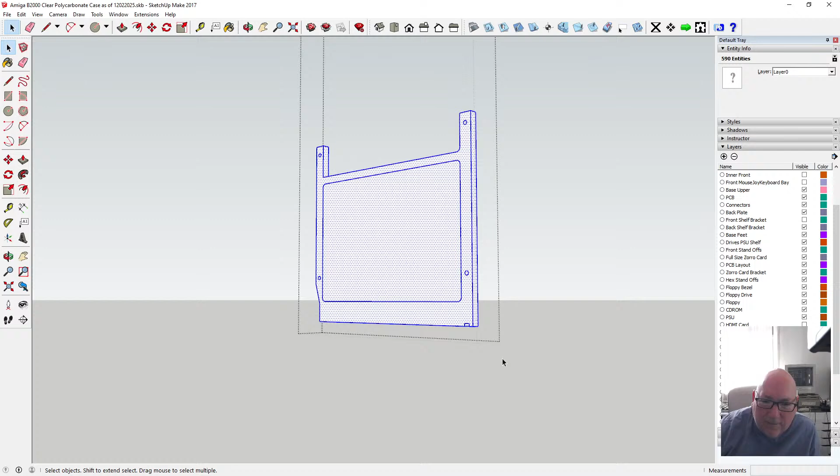Let's try the whole thing. What happens? It sometimes makes it corrupt, doesn't it? Intersect the faces with a model. Yeah, see what it's done. Look what it's done.

Right, so I have to do it manually. I'll tell you what to do. Let's just take a bar off it. Take one off, put one back.

And now I should be able to grab that and get rid. Yeah. Oh, it's done that now as well. Look at that.

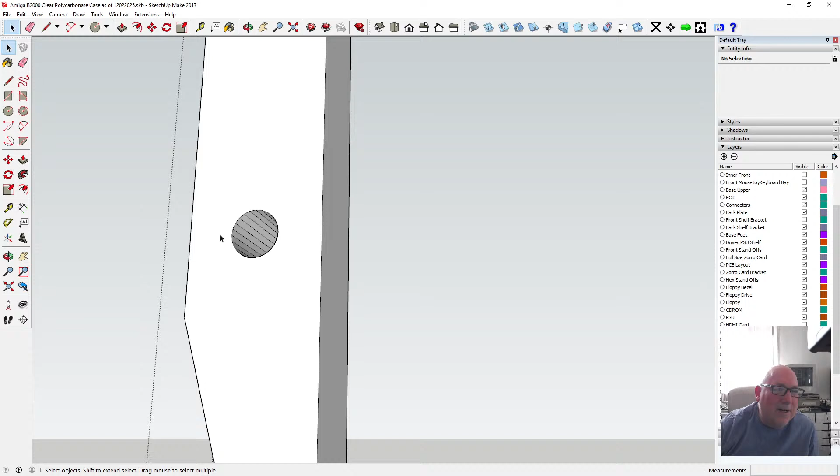Oh, it's put horrible holes in. I can't win, can I? I can't cut a break. I can't get a break out of this thing.

It's gonna make me struggle all day long, and I've got things to do. What is it? What time is it? My time is rapidly going here.

So I'm gonna have to come out of there. Oh, I'm in the wrong mode now. Damn it. It's annoying.

Right, okay. Play. Okay, have it your way. Right, so that's the one there. Let's bring it up out the way. You're not gonna make my life easy, so right.

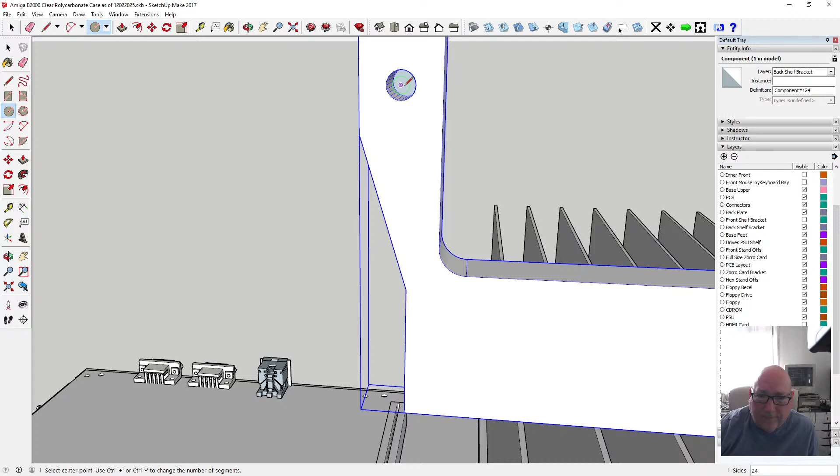Look, it's done. Right, so I'm gonna put over here a new hole over it, like that. That should allow me to get rid of this one. And then come out and then cut it and paste it in place and push it through just to get it back, basically. Get it back.

Right, I've got the same thing going on here now. Playing silly buggers. Right, so we go into there. Nothing's going to be easy. Doesn't want it to be easy. Wants me to struggle.

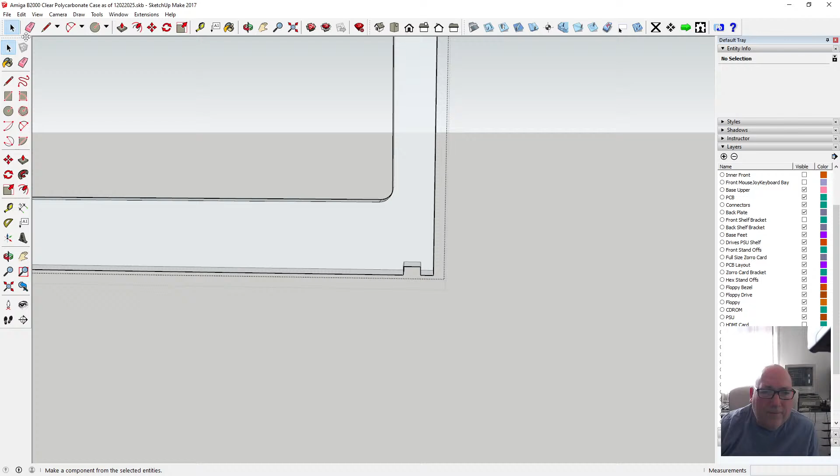Ah, need to be in this style. Oh no, we got rid of both of it. That's fine. So come out, cut it, paste it in place, move the angle so I can push it through.

Right, have we got everything back now? Are we back to where everything is good? I think so. Right, okay, so push that back down 200 mil. Right, so we're back where we started, sort of.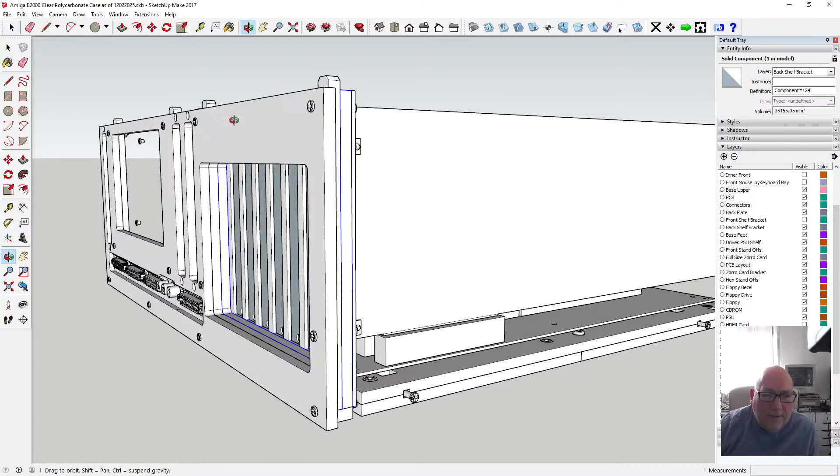So we've got our original 3D sheet. We just put in the grills. We're taking off this piece because it's too fat, and now that'll let me get my connectors in, and it's also filled the gap here where the bracket fits, with a bit of luck. Right, okay, so there's that.

And what happens if I bring the whole thing out and fill that bit? I'll do that another day, that bit. Do that another day. Yeah, I'll do that another day, that piece in there.

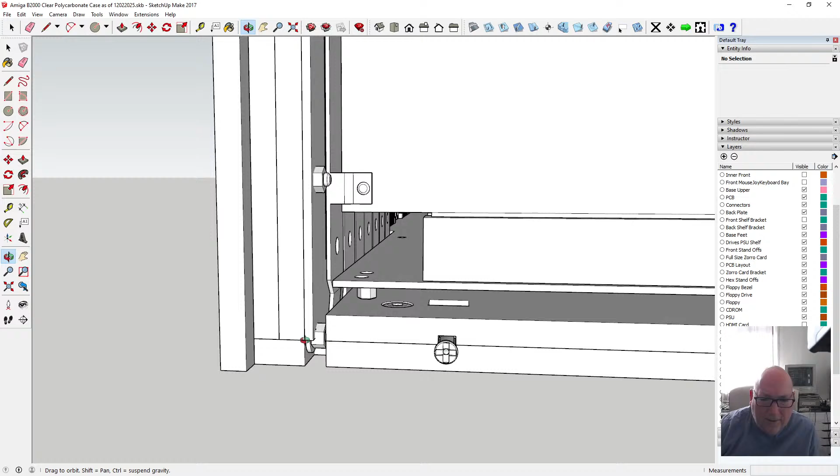Okay, so what this extra piece can be fitted to the one I've already done. Just got to get some 2mm, and that obviously changes that idea as well. Now that can either come up and round. Let's have a look at X-ray mode for that.

Yeah, so milling these out, it worked out okay, these slots. Obviously this one needs to either end sooner. That'll push them up a bit closer.

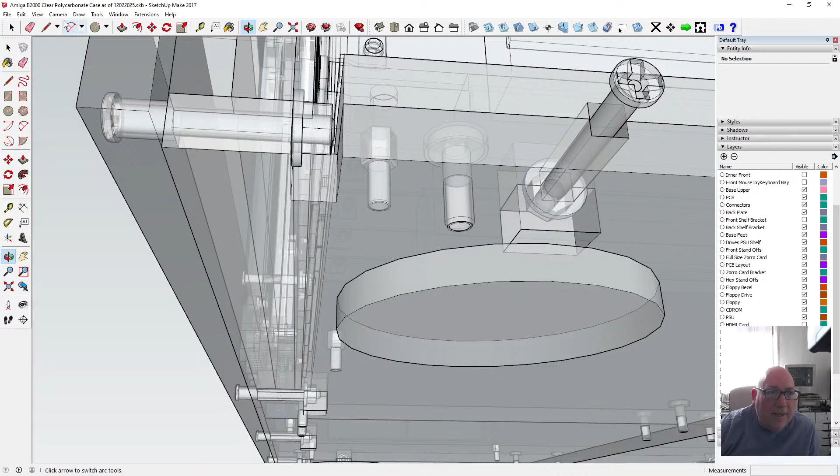So do I move that over? Tell you what we'll do. We'll move the whole thing over. Let's just make it the same size as these, same length as them. Because I had one that was slightly smaller. This one was smaller than them for some reason.

That was 12mm, and these are 15mm. So I think I'll just grab the whole thing again and just grab this lot and move it over. Just move it over 3mm.

Okay, so it's the same as the other end then. It does underlap though, does it matter? That's the board. Hang on, let's come out of it. So the reason it's that size, it's so it fits flush with this.

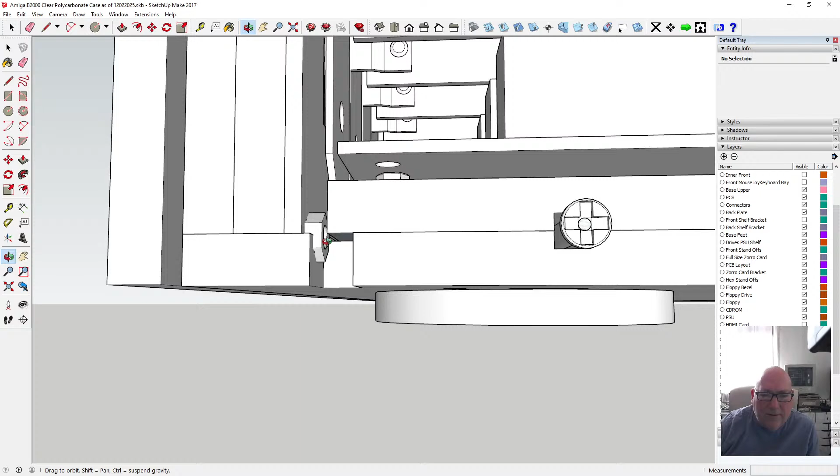Right, so the nut has to go there. So that's why I made it smaller. Made it smaller for that reason. But it is the same as the rest now.

I can either cut that bit out or move the whole thing. No, it needs to stay where it is there. Oh, actually that's brought it. No, that's brought it too much.

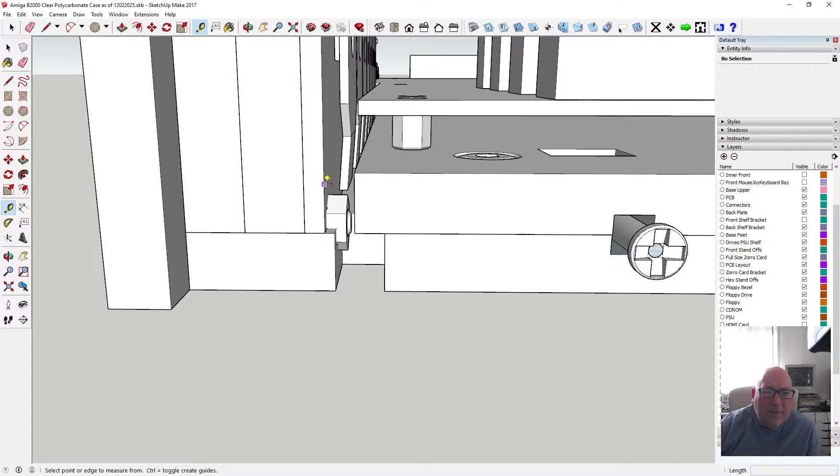So what have we got there? We've got 14mm. Oh. So the other one is 15mm.

Okay, but my thickness is only 14mm. So what do I do? I can just get away with it there, can't I? Tell you what we'll do, we'll make that one slightly in a different place.

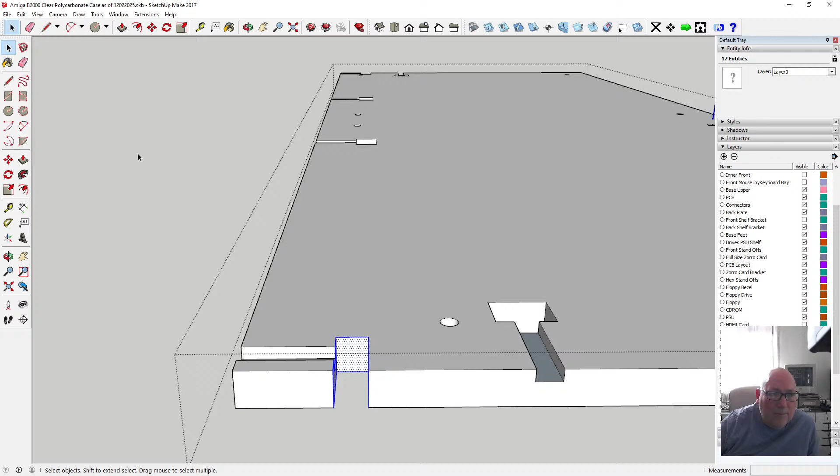Oh, I've selected too much stuff there. Gotta be careful. Alright, we'll bring that back a mil. Back a mil. Okay, and I've still got enough room. And I think I can get the nut in there.

Does that need to come out a bit? It's got the washer as well. I didn't actually put the washer on, did I, in the end? I didn't use the washer.

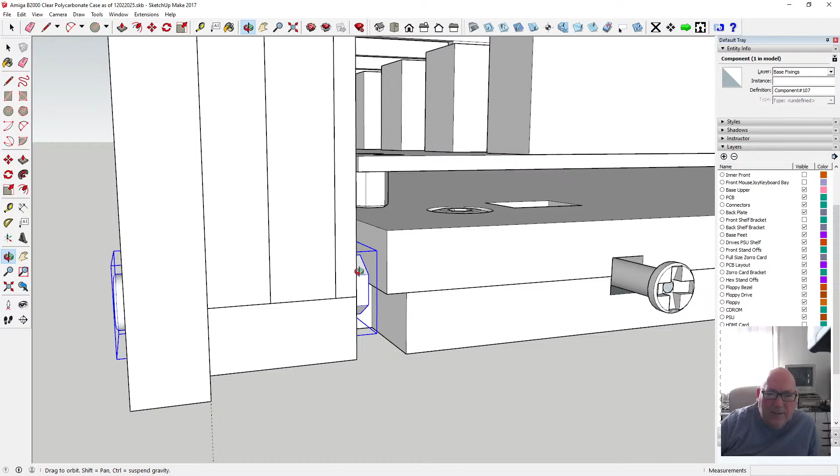Oh, God, messed it up. I'll leave it where it is. Tell you what, you can't see it behind there anyway. And the fixings there that hold it, so do we just cut round it? Cut round it, leave the fixing as it is.

Yeah, let's do some undoing. Undo. Right, okay. Should have just done this in the first place. So what we'll do is we'll just go over whatever that size is there, 10 mil. We'll just go over 10 mil.

And up whatever, 6 mil. Right, so we'll just go... oh, it's got a cut out anyway. We'll get rid of that cut out. Actually, that's part of the nut though, isn't it? Part of the bracing. Oh, we don't need it though.

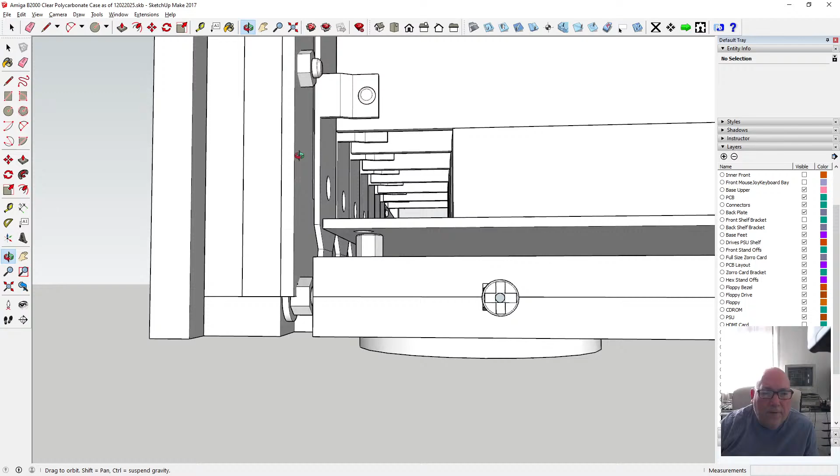We don't need it. So we're gonna go over 10 mil and up 6 mil. Won't draw it. Oh, it did draw it. Up 6 mil. Is it 6 mil? Seems a lot. Yeah, it's 6 mil.

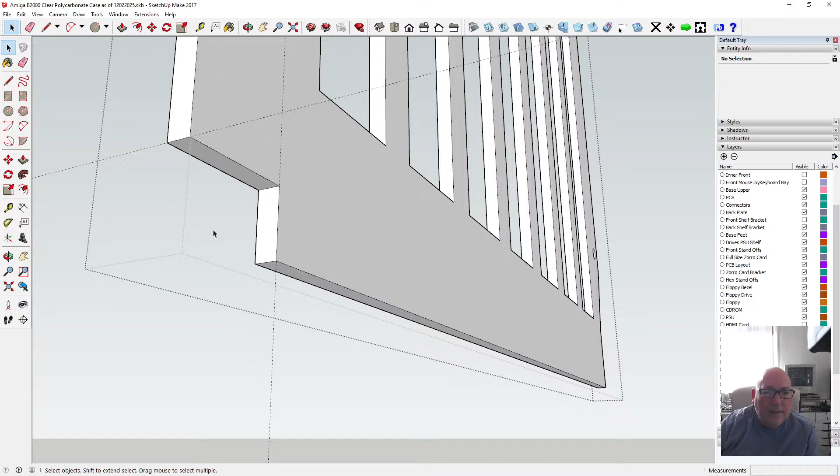And we'll just get rid of this bit here. So we'll push all this back to there. And that needs to go to there. And we can get rid of this and push this up to there. So we just cut out a little corner in it that matches that. Yeah, that'll do.

Yeah, so that's the new bit we've got to cut, so everything else stays as it was apart from that fill there. Yeah, that'll do. That's alright, we can live with that bit. Okay, yeah, it looks better, this does now. Looks better. Right, so that looks better. Looks like there's more to it. And it's thinner. Yeah, it's better.

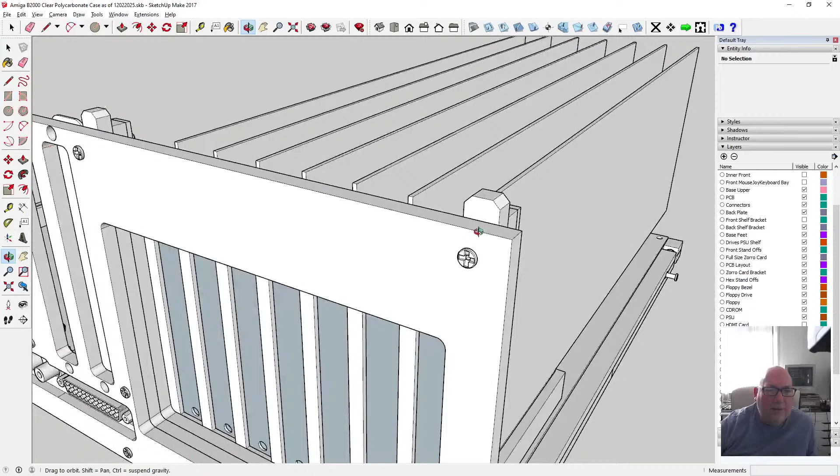So I'm going to have to make it out of a few different materials by the looks of it. Right, okay, so we need a 2 mil bit of clear polycarbonate or acrylic. Shouldn't be too difficult to get hold of. Right, okay. And these lids here, these blanking lids, they could be made out of something thinner, 2 mil again. Could you go 2 mil again? Have to bring this out a little bit, and the lid wouldn't match, so we can leave that as it is for now.

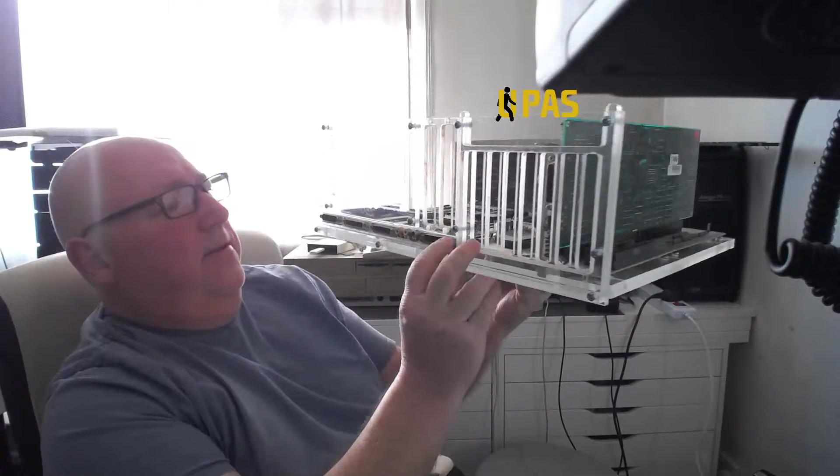This pocket here, to be telling the truth, you don't need this pocket. Let's have a look on the original. Do we need this pocket? One quick look before we pack it up. Do we need the pocket? Let's have a look. We need the clearance. Do we need the pocket? Does it matter if you can see round it? Let's have a look. I don't think it matters. I just don't think it matters. Maybe. Maybe it matters, maybe it doesn't. Well, we'll have a think about that one.

So anyway, that's going to be it for today. There we go, we got a little bit more progress on our prototype. It is a prototype. So it's a prototype to see whether it all lines up and whether it's possible to get a working system. Just to see if it's possible.